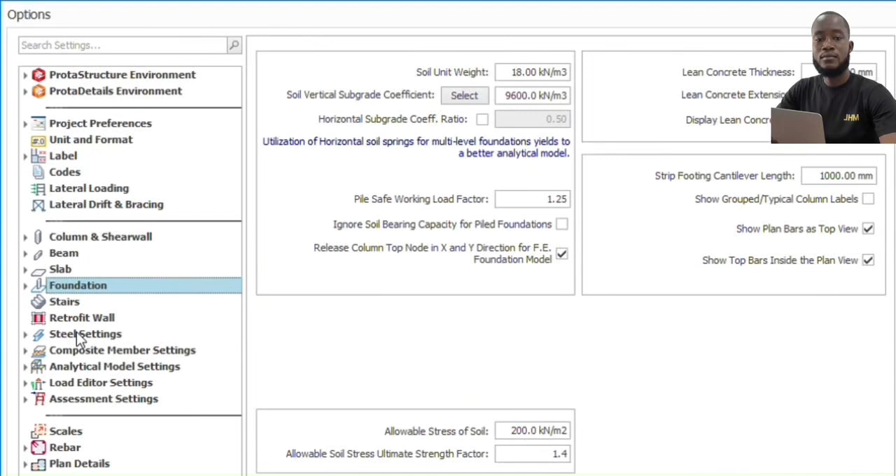Technical components of my final project include load assessment, structural model, structural analysis, and drawings and documentation. Firstly, I included the loads from structural elements, live loads based on occupancy and lateral loads. Secondly, I created building grids, set up the columns, beams, slabs, and shear walls, and defined the steel element for the water tower. The third component, Prota Suite, made it possible to run a full analysis to check internal forces, deflections, and the stability of the structure.

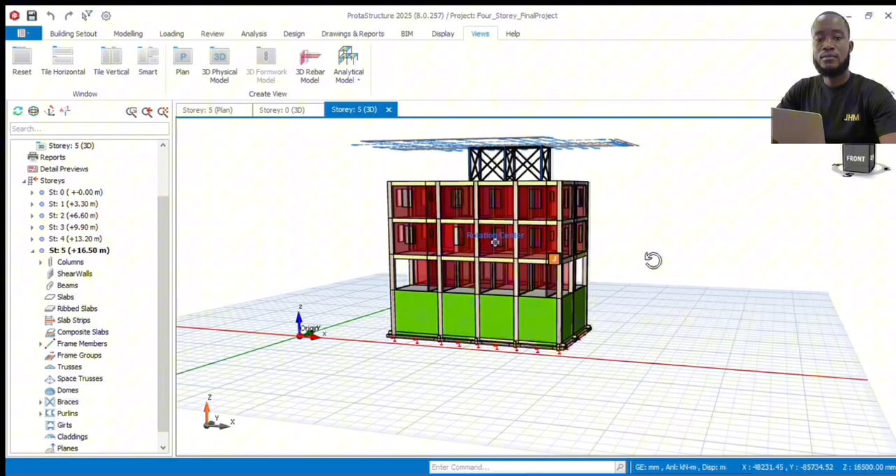Tools and skills learned. Through this project, I gained several important tools and skills. I learned to work confidently with Prota Suite for modeling and generating final drawings. It also improved my understanding of load paths, member behavior, and code-based design.

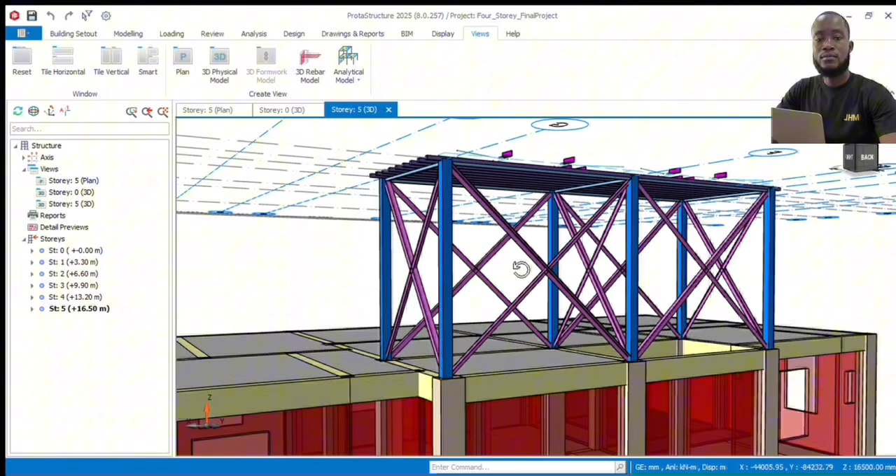So along the way, I faced a lot of challenges, and I'll just list a few of those challenges. The main challenge was design check. Little errors in spacing affected the entire model. That caused me to redo my project multiple times. And the biggest challenge that I faced along the way was my computer crashed just before the project ended. I had to redo the project multiple times on several computers, and that was a huge challenge for me along the way.

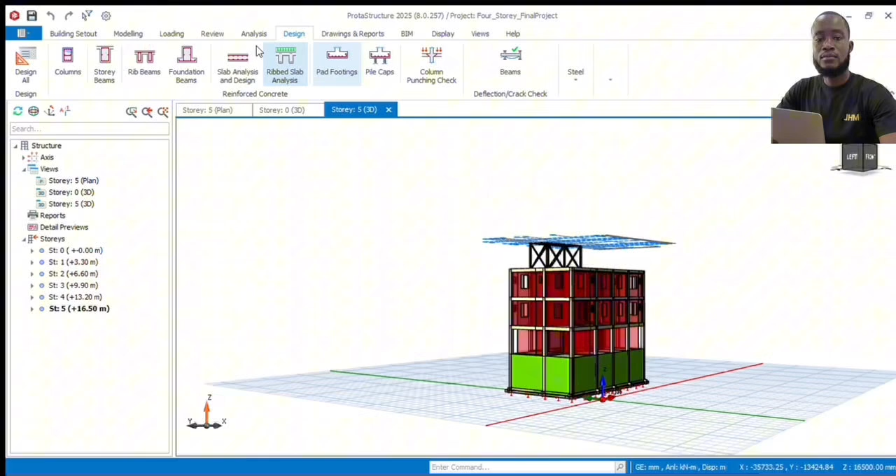Another challenge I faced during the project was the reinforcement details for slab and beams. The software produced details that were difficult to interpret, so I had to research solutions from my handout and the internet to adjust detail settings. So just to go through the entire layout.

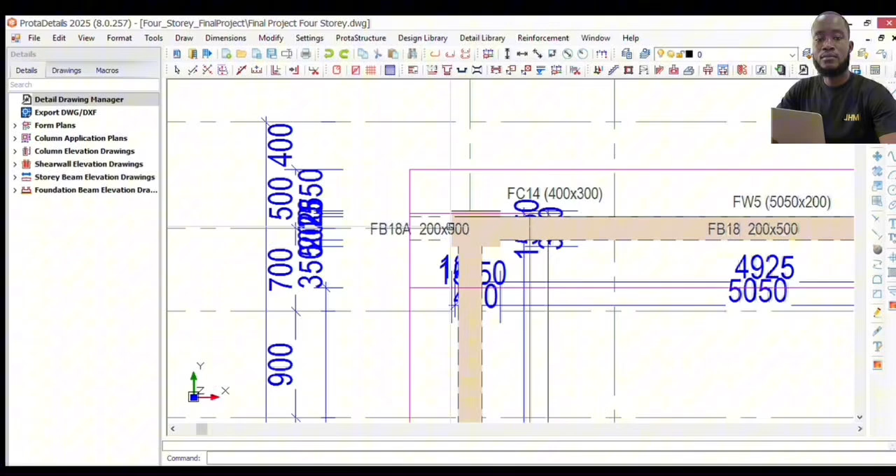So this is the foundation plan from the Prota Structure detail of the four-story with a water tower at the staircase level. So you see here, you got the column here. The work has been exported from Prota Structure to Prota Details. So you got the columns here with dimensions, everything measured here. So this is a 200 by 500 beam along the grid. And this is the foundation plan for this design.

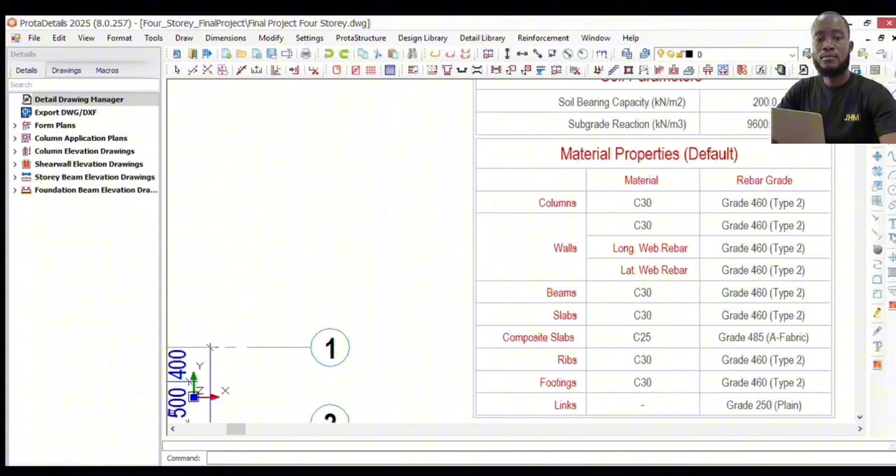And you have a table here, where you have the codes, the soil parameters, material properties, and defaults. You have C30 for the column, C30 for the wall, composite slab with C25, and you have the rebar grades all lined up here for the foundation. As you can see, this is strip footing along the foundation.

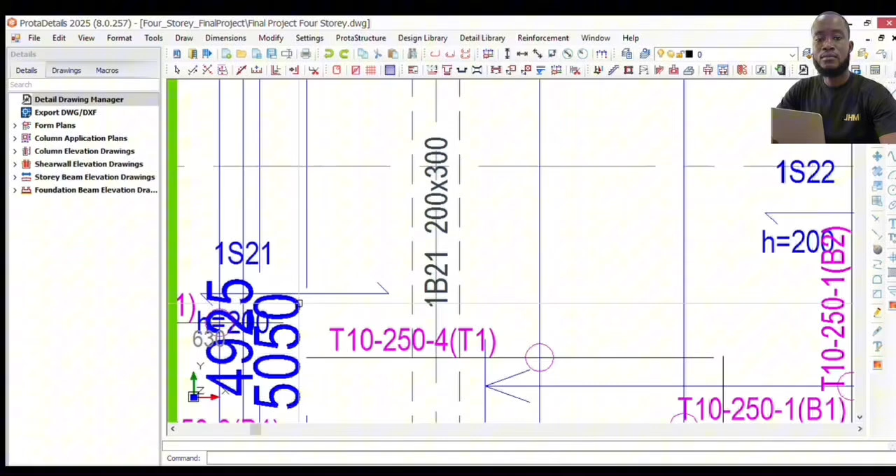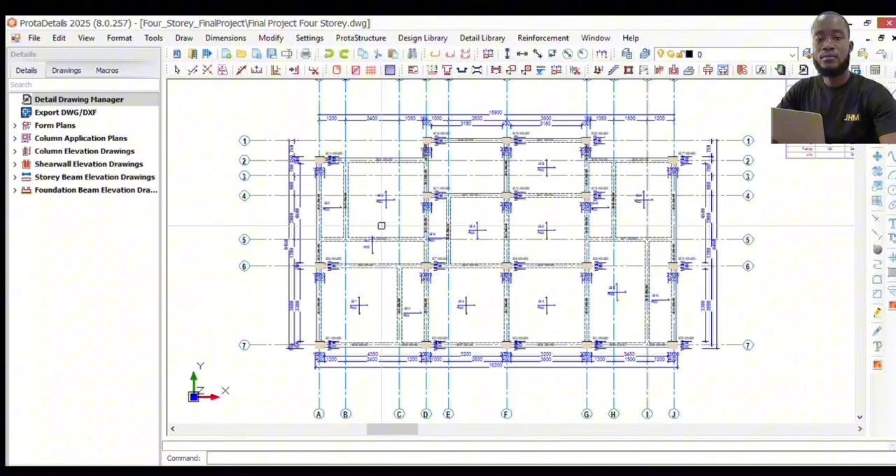But this is Prota Detail. After you've done work in Prota Structure, you come to Prota Detail, and it gives you the complete design of everything that you need. Each of the columns in design. We have the beams and the columns. This is the slab reinforcement, everything we got here. Columns. This is the column. The column has all the detail, all the steps here. Section.

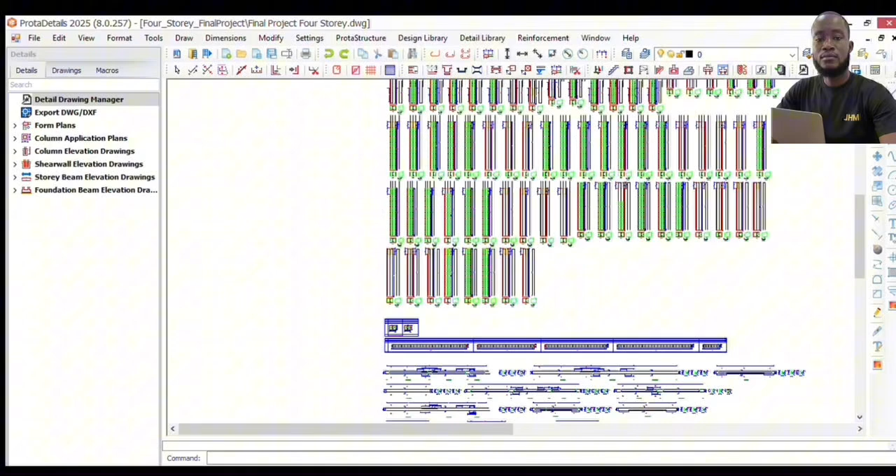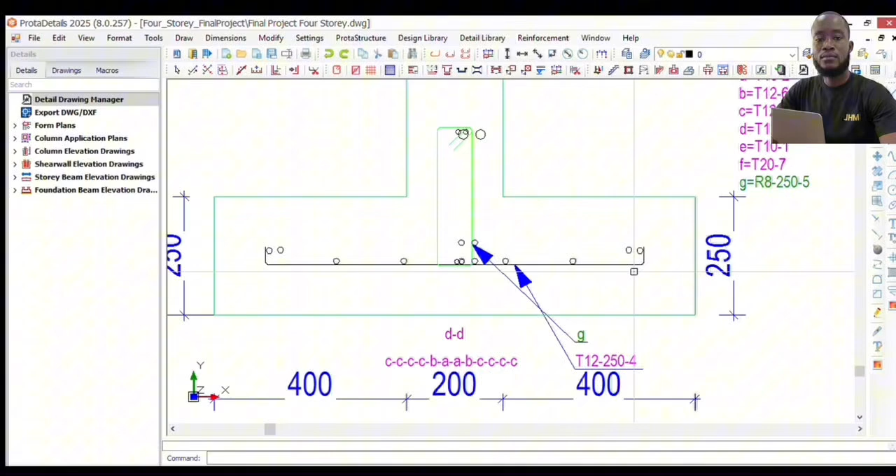So this is Prota Detail. We have the beams. So these are the beams. So here we have 3T10, three bars of diameter 10 on the upper level. We have two of diameter 10 listed here, and we have the bending, which is 530 millimeters. The column from 7 to 6. We leave everything in slab. And this is Prota Detail with all the columns and beams in the entire structure, everything to do with the foundation and its detail at the level here.

So this is Prota Steel. Everything has to do with the steel. It has nothing to do with the concrete design, because we have a tower at the top, so we have to give indication for this. So this is our steel, and these are all the connections. At this connection here, you see how the steels have been joined. These are the main coordinates for the water tower, where the water tower is going to be sitting on.

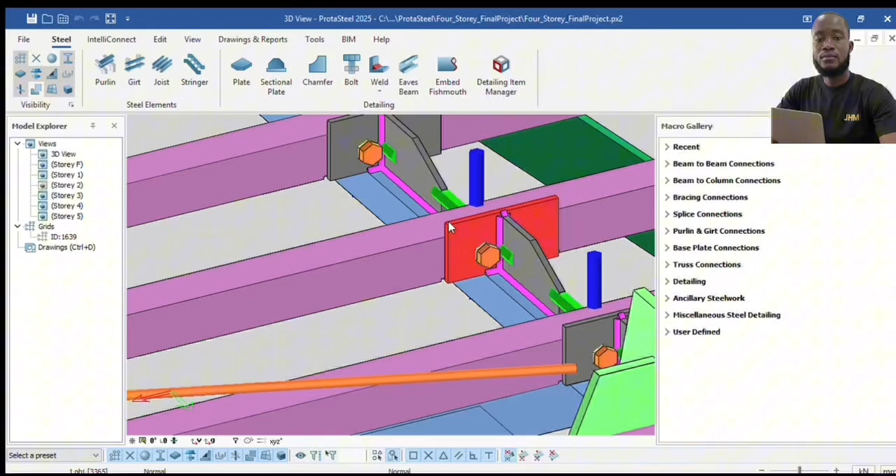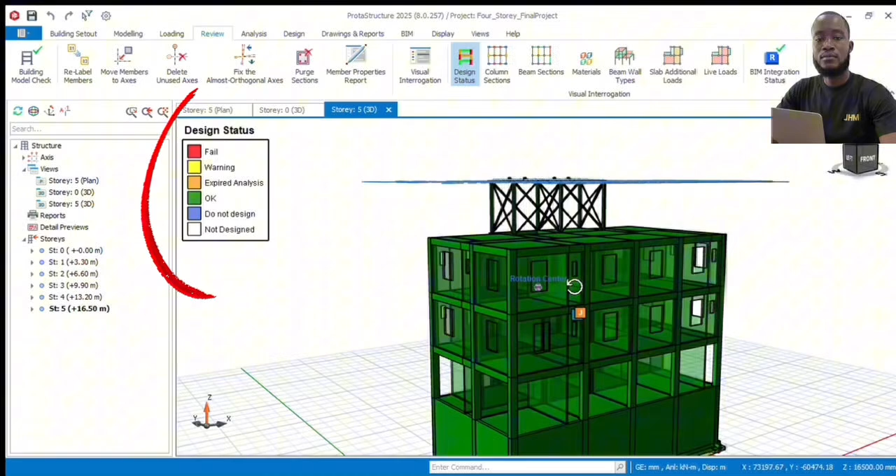It's a wonderful experience, and as you see here, these are the colors for the design status. Red means the structure failed, yellow is for warning, and orange means the analysis expired. Green is okay, and blue is do not design. So as you see, the total building here, everything is green. That means our building is okay. Everything is well designed. The structure frames at the top here are all well designed.

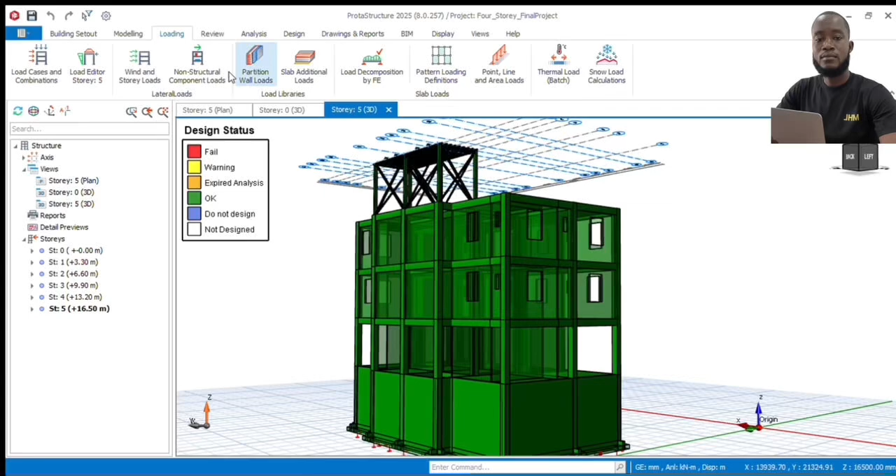In conclusion, this project helped me strengthen both my technical knowledge and my confidence as a young engineer. It allowed me to practice real design procedures, understand the decisions behind structural systems, and apply modern software tools to produce complete engineering work. Many thanks to MITS for affording me this knowledge and skill to analyze and design structures in Prota Suite.